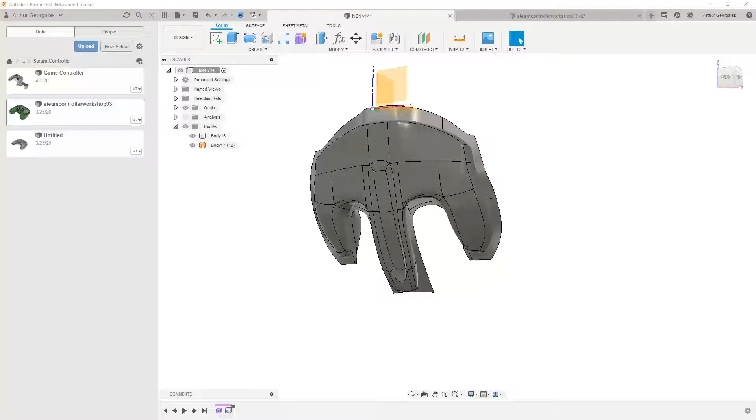Today we're going to look at adding in some details and features to our game controller models. Right now, mine's at the point where I've just got the form, like a solid body, and I've got a non-planar surface to split it up. But we're going to look at a couple little things right now.

We're going to look at adding in some buttons. Yes, this is modeled off kind of like a Nintendo 64 controller where it's wacky with three handles and was amazing. Some other controllers, like the PlayStation controller, have a very strong round profile which is dead flat for a D-pad or directional pad. So what we want to do is look at ways of bringing that in, if we want a flat directional pad or something like an odd shape.

We need a flat surface to bring up buttons onto, which makes it easier to model our buttons for now. So we could do this as a free form, or we could just do something quite simple and sketch it up to control it.

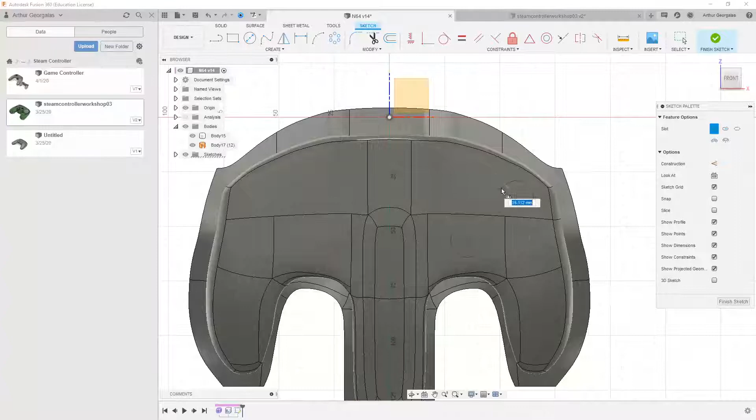Even if I just go to do a slot, something like this, then we want to cut or extrude and position this and join it to the main body. We can make it quite thick because we've got heaps of real estate to work with here. So we can go something like that - doesn't really matter - new body, and then it's just about positioning it in place.

We can just select it, push it to somewhere we like, and play around with these to get the right type of settings you want. It doesn't really have the great control that we see in freeform selections, but you can change the actual pivot points by coming in, and if you select an edge, it will allow you to rotate it across that edge.

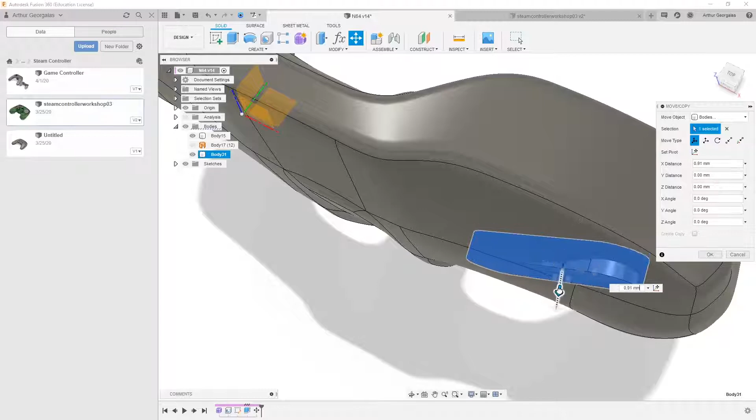Once you tick done, then you can rotate it across that edge. We just want to get it to a point where some of it's sticking out, and we just have a flat surface to work with. So something like that - yeah, that should do quite nicely.

So we hit OK, and we can see that this is our surface. Maybe it would be slightly rounded across the face, but it doesn't really matter for this sort of application right now. So what we have to do is just combine it with our main body - select both of them, operation join. We don't need to keep the tool, and it goes and joins them together.

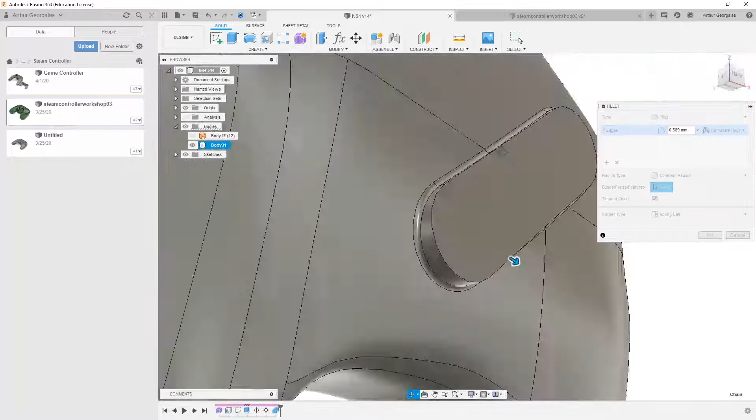Then we just want to probably blend it in with a fillet. With Fusion, fortunately, we can get away with doing a large fillet that goes all the way to the edge. Playing around between tangent and curvature can give you some different results, but curvature generally doesn't like going past the edge. So we can do something like that, and I don't know if it'll let us run one on the top as well. Yeah, see, that's obviously not what you want.

Okay, so something like 0.5 comes up looking quite clean. Ideally this would have some slight curvature to match what the controller's doing there, but again in this case it doesn't really matter, because it looks weird anyway, and I probably wouldn't go with that shape on a final design. So that's what allows us to have a flat base.

We went over this briefly, talking about adding in the same sort of thing for joysticks as well, to just quickly put one of those in. You can do it with freeforms, or you don't even have to sketch something like this - you can literally go create a cylinder or sphere.

So if we create a cylinder, wherever thumbs end up on this thing, however big it is, and then it's the same process of moving it roughly into some sort of position. Maybe we'll tilt it out that way a bit, and have it protrude more, because then you can do something like dome it significantly.

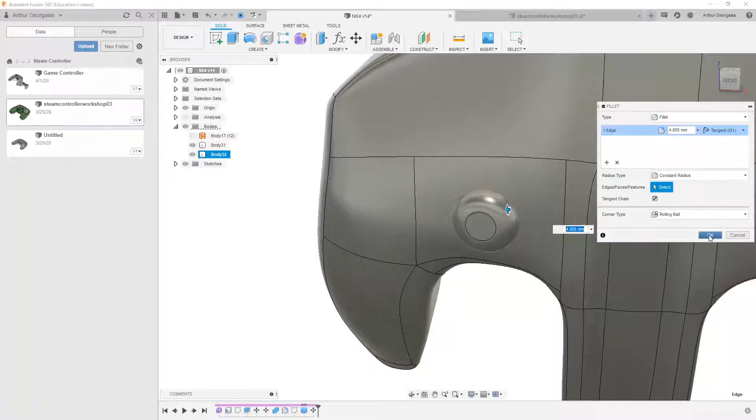It looks a bit small, so we can go back in, edit, change the diameter to like 30, and then it's sticking out the bottom there, so we're just going to adjust that so it's sitting completely within it. Do that - it's nice and domed. The angle's not quite right, but again, that does not matter.

Modify, combine, join the bodies together, and just run a little fillet on there, maybe 4 - that's probably a bit big, maybe 2. So we've got something where it's blended in and it gives us a nice base to work off.

I think the really good thing about something flat is that you can sketch on it, because we've made it using solid modeling and the surfaces are planar, so we get all the control we would want in terms of just sketching. Otherwise you've got to get a plane on there, which might be flat, might be pretty flat - again not really a big problem, but for ease of use I'm pretty happy to go with this way. So yeah, that was just a brief little thing on that.

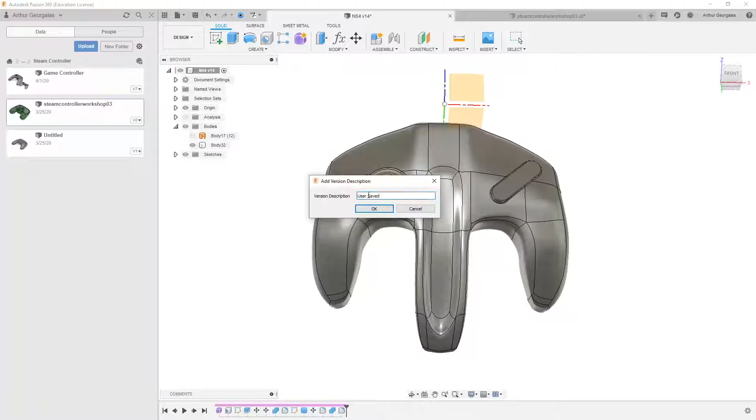What I want to go into is how I go about splitting up a surface. Generally at this point what we want to do is have our material thickness sorted. Right now it's completely solid, which is good, because we want it to be solid when we're adding in these bits, so that when we shell it, it follows along these contours. Otherwise we get weird geometry hanging out in the middle of this thing.

Alright, sorry about that, I just had to pause and start the recording. I was having issues with the fillets I had put in around here and here - they didn't want to shell properly, so I've just disabled them, or deleted them completely for the moment. I'll re-add them in later.

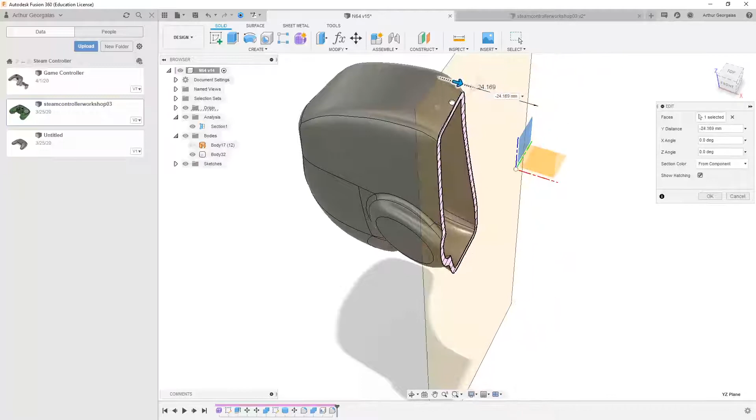It shouldn't matter. So right now, where we've got it shelled already, we can see it follows this inside contour. It's not going to make a big difference if we then fillet something like this after the fact. But sometimes the shell command does not like shelling small fillets, so you might end up with something like this, and you can just round that inside bit later - not really a big deal. Anyway, moving on from that.

Now that's shelled. We always want to do our shell after we've joined our geometry, so we don't get those weird inside shapes. And now we want to find a way to split this surface into two.

And we've got our mad non-planar surface - this is quite a complex form. There are some areas which may not be perfect on it, but if we go to edit our form and hide that main body, we can see it's pretty consistent. You can go through and do things like make uniform, where sometimes it evens it out a bit more when you move it back and forth - I applied it before, so there's not really any change there. You can also use the smooth command, which smooths out some areas just a bit.

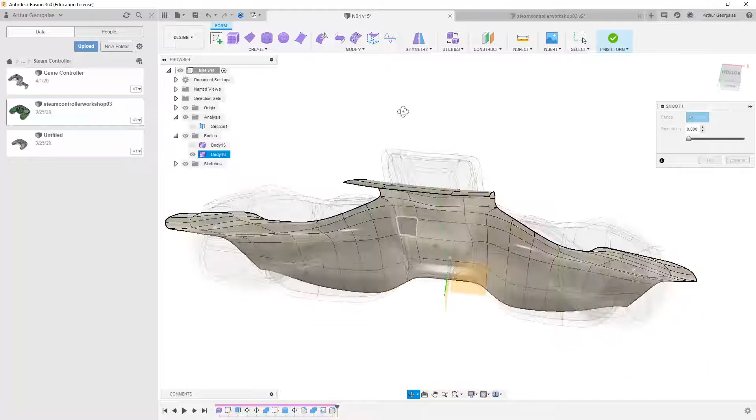So if this area wasn't doing exactly what I wanted, and I was just trying to blend them - see, we can turn that on and it smooths it out quite nicely. Where we have this, it's a little sharper here, and bringing that across blends it up quite neat. You could do that in a lot of areas, like especially down the front, though it can start to be a problem towards the handles, because you generally want a very smooth transition around here on these faces. And if we do that, we can see it's just smoothing them out - that's really up to you if you want to go about it or not.

Sometimes it can do things you don't want it to do, and smooth it badly, so it doesn't have to be smooth in some areas. Sometimes you need a bit of a sharper transition, but that doesn't really matter because we can look at that in a minute as well. But I mean, that seems fine.

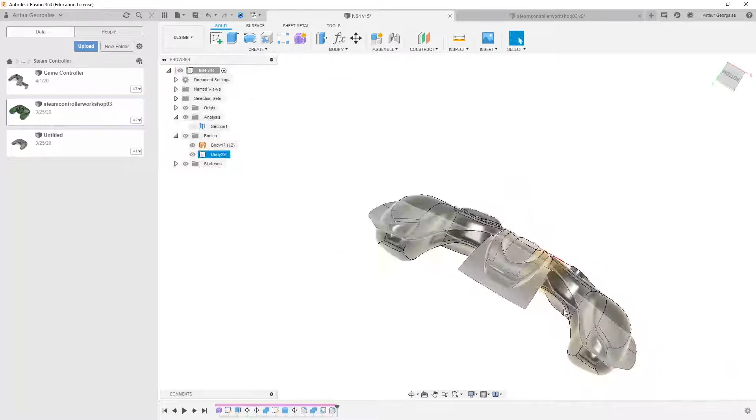So we want to go about splitting this up. The easy and very basic way to do it is to just go split body - select the body to split, so obviously the game controller that is shelled out, and then we select the splitting body. We don't need to extend because we've made sure it goes all the way through. We run through that and we get two halves of this controller.

The problem is there's no real way these are locking together. We want what's called a lip and groove, or in woodworking like a tongue and groove joint - when one area sticks up and the other sits within it a bit. So I want to go through the process of how I do that. Dustin's got a pretty cool way of doing it too, but let's go with my way for now.

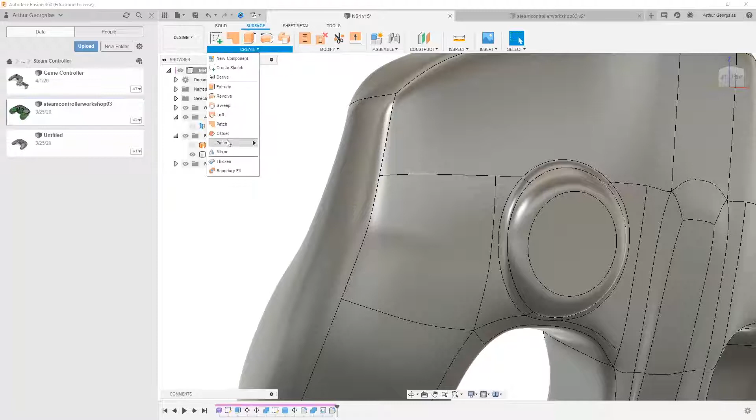What we're going to do is offset our surface inwards till we get a middle plane, and then work around that center section. So what we need to do is, if we know the whole thing here is 1.8 thick, and we're going to split this in the middle, we need to offset the whole thing by -0.9.

That's selected faces. We can't really select the whole body because it's not tangentially smooth. So we can go back, way back, before we actually added any geometry, and throw in our offset here.

So really take advantage of the fact that you can roll your timeline back and forward. I'm just going to put that at 0.9. Because it's such a complex shape, Fusion is going to look like it's crashing every single time I do stuff, which is fine, that's just part of it. And there we go, all right, so that's fixed up.

So now when I roll it forward, we can see that it allows it to calculate the rolling forward, because then it has to redo that split for some reason, that shelling operation.

All right, so if we turn on our analysis, we can see that there is a surface that is exactly halfway between these, which is great, it's what we want.

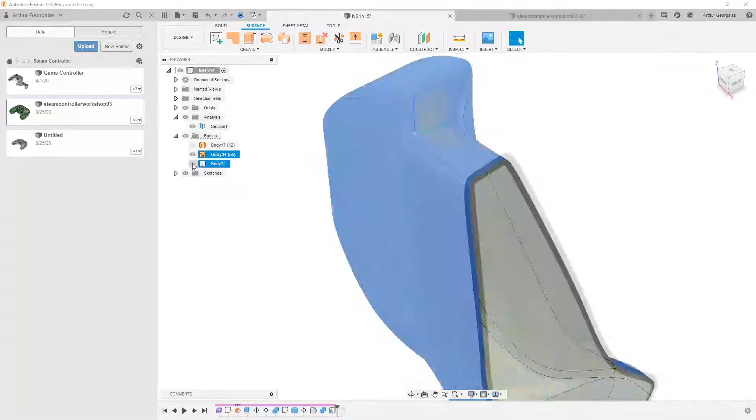And what we need to do now is create a way to make a zigzag pattern or zigzag shape in order to split our surfaces with it. It's going to make a lot more sense when you actually see what starts to happen.

So I had some issues with Fusion crashing again, so we're just going to do it again, offset. What I'll do is offset it 1 mil this way and 1 mil in the opposite direction. It'll let me select it nice and easily. So 1 mil and -1 mil.

This is going to allow us to split up our inside section and create a nice shape that we can then split our body with. I'm just going to remove this one because we won't need it anymore.

Now we want to start splitting these against each other, so you can pretty easily just use surface trim. We want to get rid of the inside of the outside of that one and the inside of the other one. Sometimes it doesn't select through nicely.

Let's just hide that. Yeah, okay, so it didn't really like selecting through it. That's okay, we'll just do it in another feature.

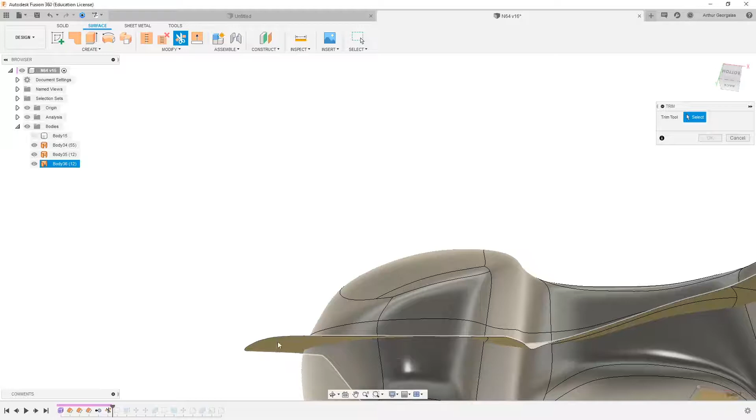So from here, what we can do is trim using this, trim away the bottom. Now we can grab that, trim away the inside of this, and grabbing the inside of our first offset and trimming away the top of the controller.

This freaked out and crashed Fusion just before. I don't know why, sometimes it just likes doing that and not figuring out how the surfaces work. So I'm just going to go ahead and hit save.

Then the thing is, we have 3 bodies here and they're all separate, so what we have to do is stitch them together. In SolidWorks we would call it a knit, but we're in Fusion, so we call it a stitch. As long as our tolerances are high enough and we see green, we're all good. And what that does is brings it all into one body.

So now if we show our shell, let's roll forward a bit to where it's actually shelled out. If we show our shell with our analysis, we'll see that we're cutting a clean path through it. But we also want to work with the idea of tolerance and giving a little bit of gap to the whole body as well.

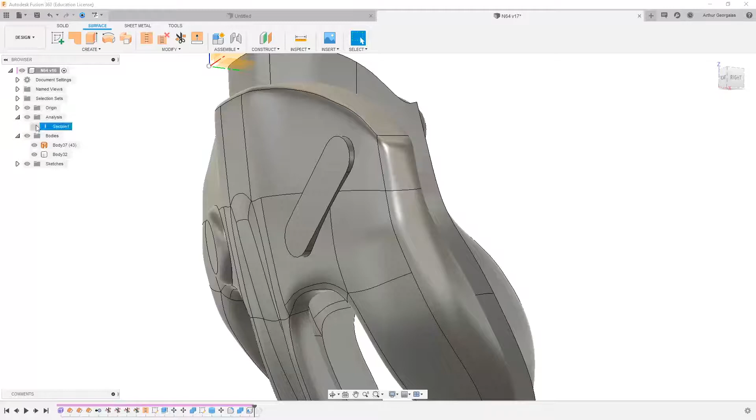So what we can see is, if we can select this body, we can see that it's traveling perfectly through the center, which is exactly what we want. It might be a little close to the top there, but that's okay. We'll just ignore the problem and it'll go away for now.

So then what we want to do is just run a chord length fillet along here, and we can just go like 0.2, see what that looks like. These might take a while as well to calculate because it's quite complicated following around all these shapes. Okay, so that's much too small, so let's go 0.5.

And we want to use a chord length fillet so the distance between the lines stays, well, so the lines stay parallel to each other. That'll make it easier to thicken. So yeah, something like that.

Let that do its thing. Then I'm going to hit save because Fusion's really in a crashing mood today. Sometimes it just likes doing that.

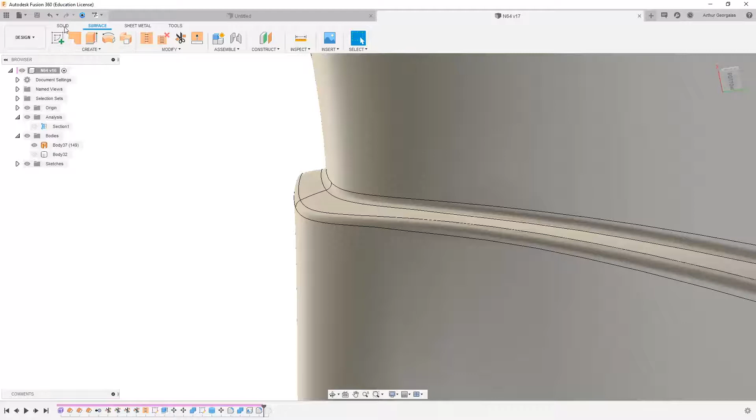What we want to do is thicken this body against our main body. We can thicken it as a new body and then use the combine feature, which should run a bit quicker. So we just go thicken, select this, and I'll hide it and do it as a new body, just so it's actually doing it as two separate operations.

We want to do it symmetrically, so it's pushing away from the fillets and then into them. We can just go like 0.2 and see what comes up. If the other body was showing, it would try and calculate it as a cut at the same time, and it might take a lot longer, or it might just crash. So sometimes it is good to split them up. We can see that 0.2 mil looks like it's going 0.2 in both directions, so it's actually way too large of a tolerance. So let's try 0.05 maybe. It doesn't really matter right now, we just want to get something in there.

Let's let it do that, and we'll use this to split our main body in half. Whenever it gets around to it, there it is. We'll hit OK.

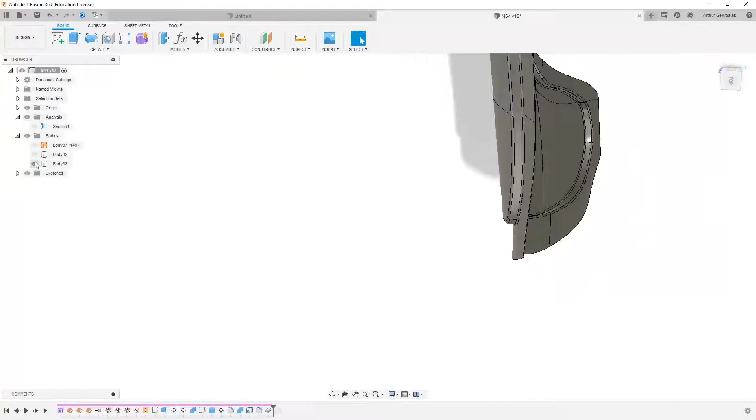We can check this too, again, it's always good to use these analysis tools with the section views, especially when we're talking about keeping a consistent section throughout the whole part. So show that, turn on our section view, have a look, and we can see we've got this nice sort of part here. It would probably be better to have these lips a little bit smaller, a little bit sharper of a radius on that, but that's not really a big deal.

Then it's just a matter of saving, just in case, and going to modify, combine, select the target body, the tool body, we'll turn it to a cut, and when that figures it out, we'll just let it run.

I find I try and use the combine feature a whole bunch in Fusion because it's really quite a powerful feature. It can get a lot done that you don't often see working well in other programs.

So here now we've got this really nice uniform cut, and we can come back in and change some of these dimensions if we want to make the tolerances tighter or looser. And we've got it coming all the way around, and it looks quite good, quite neat.

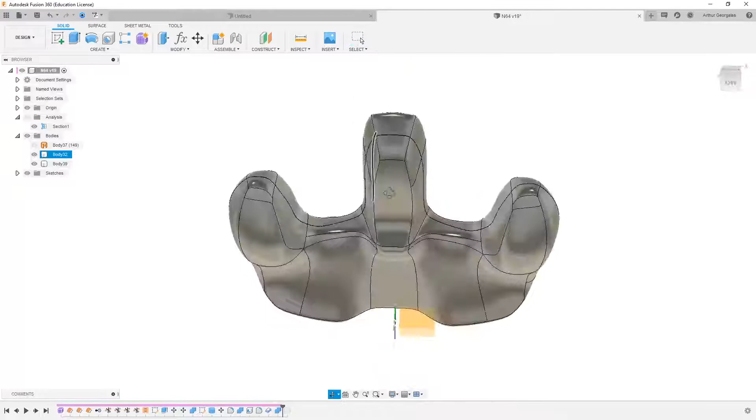One thing we want to check for is that these faces are a regular sort of width. So if we were to mix up our cutting plane and it was at a large angle, cutting across this at a weird angle, we would see that the distance from here to here would be a lot different from the distance from here to here. We just want to make sure it's relatively consistent throughout the cut. Otherwise you're not cutting perpendicular to the body. So yeah, something like that works really well for cutting it up.

Then you might want to run a really small fillet on this edge. In terms of rendering, we're going to be looking at getting our part line showing, since rendering up our part lines makes it look much more like a product and much more professional. So when we come into here, we turn on In-Canvas Render.

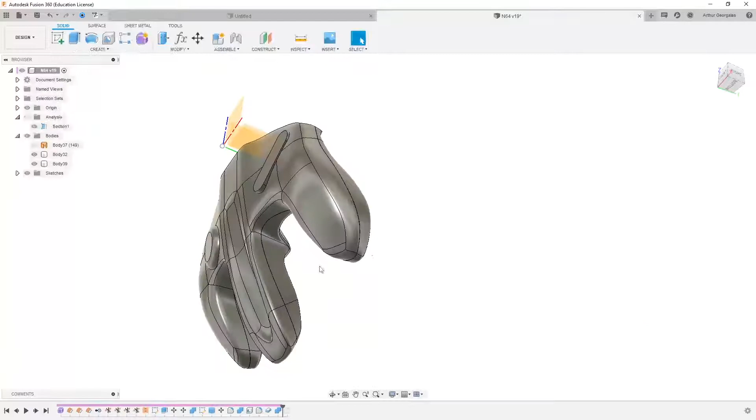We can see there's a very slight lip in there. We actually want to come back and maybe make it a bit more noticeable. Sometimes you might find on the real products that the lips are really small, but this is one of those things where for the design purpose, we want to show off our skills. We want to show off we know how to model in a lip and a groove and all that. So the more noticeable you make some of these things, it can actually be beneficial instead of trying to make the cleanest, smoothest surface ever. You want to show that you've considered those elements in the design.

That doesn't look like it's working, so let's just go 0.2. It's probably too large and was running into the other elements. So something small. Chord length, again, you want that really consistent. Even that does look a bit large, but I'm going to live with that right now. Once that finishes calculating it and applying it, we can go and have a look at how it looks in the renderer.

And we can already see it's a bit more noticeable. We turn on the renderer, or in Canvas Render.

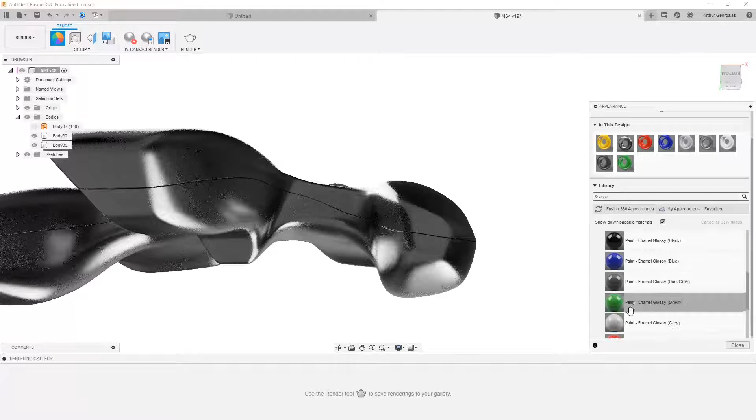I might just throw a gloss color onto that. Down to paint, gloss. Yeah, gloss red. Gloss yellow, why not? So we can see that it gets this really cool part line between them, and that type of shading, the ambient occlusion, is really good to see.

Because it looks like it's designed to actually snap together, which it is at this point. So I'm just going to show that and go ahead and make these a little less gross. So we've got that. Our product is now, our controller is now split nicely in half. We want to look at implementing other parts of the design.

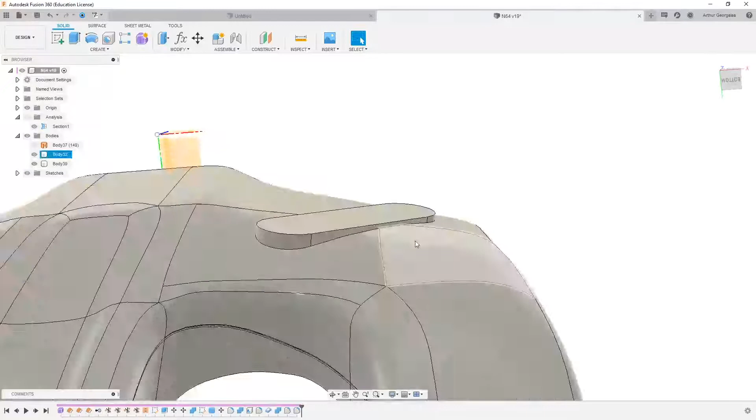So I'm just going to roll this fillet forward, which should round that out. And we'll just blend this back in again nicely, seeing as it doesn't want to crash anymore. Hopefully. Nice chordal fillet there.

And I'll see if it can do one on top without killing it. It cannot. Okay, so a constant radius works because it can blend that together a bit better. Let's just go, can we get away with 0.5 on that? Nope, 0.25.

Okay, so it's going to be a very sharp edge on that. Well, somewhat sharp, but we'll live with that. So what we want to look at is how do we put a button on this type of surface?

Our best reference at this point is to go to our Steam controller and open it up and have a look. We want to look at how we make buttons, how they make buttons. Let's just ignore that. And what we have to do to actually bring one into our thing, model it up right, and make it look real and, to some point, manufacturable.

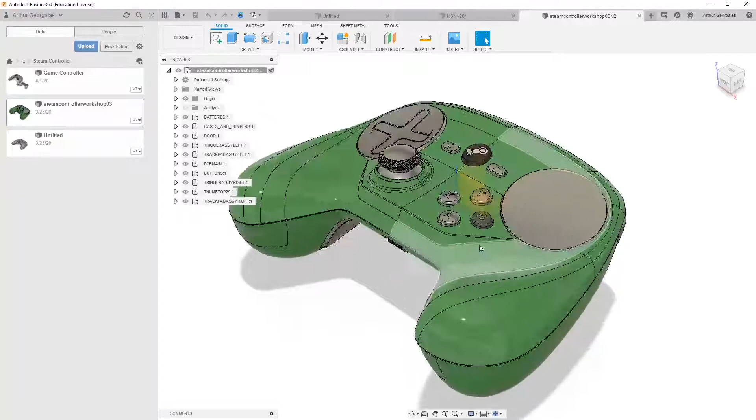So we've got the buttons here. First thing we want to do is just hide that main body. And we can also get a good idea of the PCB at this point. So these aren't super long. The PCB should roughly be in the middle of the controller as well. And that's important to note.

So right now we're going to be looking at the buttons and the thumbstick. So let's have a look at one of these buttons at the moment. Let's go with the X button, because why not? So we can just open up buttons, come down to button X, right click it and go isolate. That's going to allow us to see just the X button.

And if we open this up, we can see it's made up of a couple little bodies. It's got this inner section, and it's got some markings on the inside, which are neat. And it's got an outer section which sits over it.

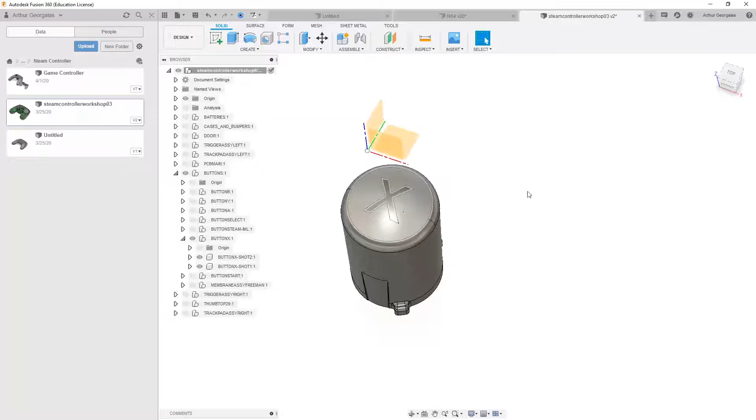I mentioned this briefly, I can't remember if it was in the introduction video or one of the other ones. Generally, the way it works is the inner body is colored. So this will be a solid color, this whole section. It'll be injection molded in a color, and that snap fits into this, which will generally be like a gloss black or gray. And so no matter how much your finger or thumb wears down this, you're not going to lose the color.

The plastics on both of these are going to wear down at an equal rate. And we are talking minuscule amounts, but over the years of using a controller, you still want those buttons to be nice and crisp. So pretty much looking at this, what we have to do is create some sort of cylinder within it that has an X extruded out, and this one has to match the bottom one. So we can do something like export this out into its own thing and have a look at it there.

So let's go ahead and do that. What we can do is select our button, right click, and export it. That's going to allow us to save it. It does want to go in Advanced CAD, Steam controller, game controller.

Another part that's really important to look at here will be the thumb pad, or the thumbstick, sorry. It's got this weird knurling on the top. I would probably avoid using that.

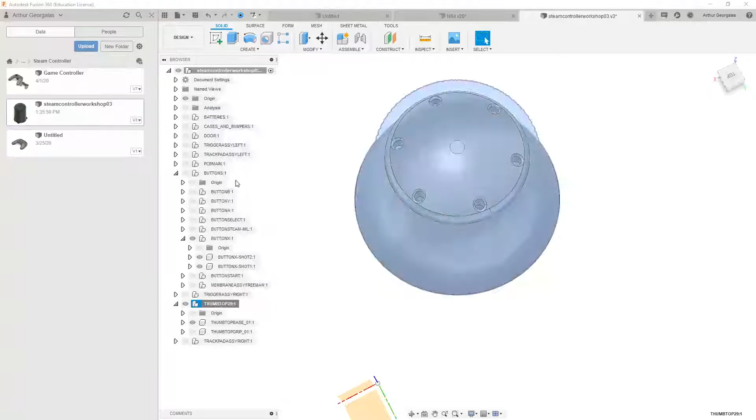We can grab this as well, so we take the base. That's just a body, so we do actually have to export the actual part. So we select it, export, Steam controller, thumb top, sure, just go OK. That's going to take a second again.

Okay, so having a look at our buttons, we can see that it's got the inner and outer part. This one's gone quite transparent, I'm not sure why, but that doesn't really matter. We just got to remember that it travels down into the body of the controller. It only protrudes out from the top a little bit. Hopefully turning on cases will show us exactly what that's like. Okay, doesn't matter.

So we've had a look at our button. We know that it's got this sort of cross section going on where there's an inner and an outer component. So we can go ahead and model that up on our pad.

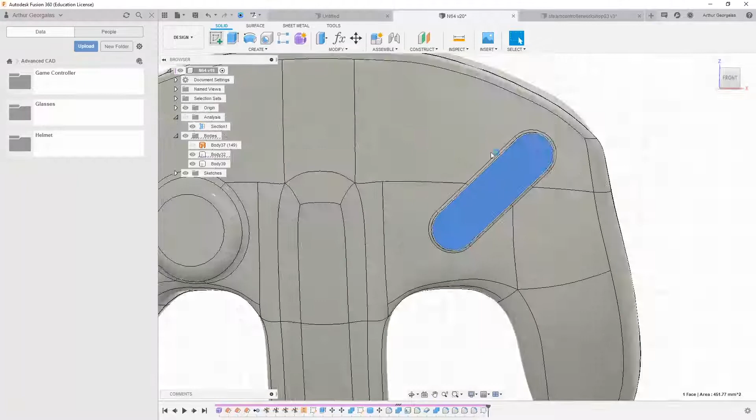Because we used a flat surface here, what we can do is just start off with a sketch right on this face, and maybe we want to fit nicely here. We'll have like 5 buttons down here or something ridiculous, it doesn't really matter. So we can go and create a line across here, and use that as our reference for finding the midpoint or the center point. Sometimes arcs like to pick up easy, sometimes they're a bit complicated.

From here we set a dimension of 10 mil, seems good, maybe a bit too big, but whatever. This is going to be the maximum size of our button. We want to extrude it, and we want to make sure we're extruding it directly up and down. So what we want to do is extrude this directly upwards.

Unfortunately, Fusion is a little wonky in that regard. It doesn't allow us to select a direction to extrude along like something like SolidWorks might. So either we could have our buttons at an angle, or we could figure out how to extrude it directly downwards. So we're just going to have a look.

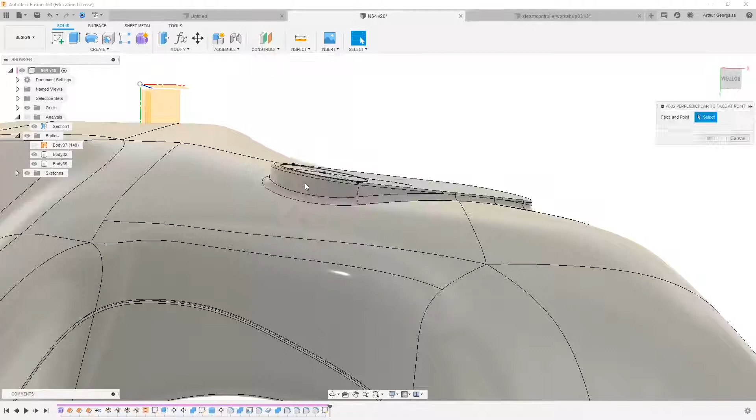Maybe we can use an axis to help us. So what have we got? Axis perpendicular to face at a point, no, that's going to be the exact same thing. We can go construct axis perpendicular at a point, through a cone, axis through 2 points, axis through an edge. So there's not a lot of options here. Like you would like one that was through from a point and directly up.

Maybe we can just create one by creating a sketch, doesn't matter where we select it. If we turn on 3D sketch, and select line, we can go from here. And from here, if we go on, say, like the right plane, it allows us to do that. We hit OK, and it actually comes up with that sort of green line, which shows us it's on that axis. So we can just hit finish there, and that's going to allow us to extrude this straight up.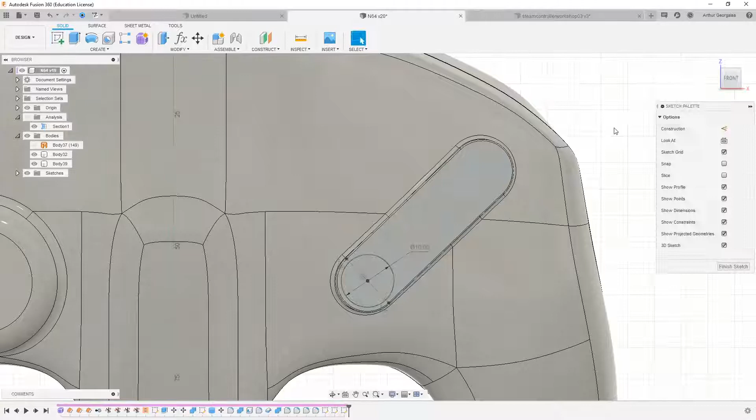We could do other things, we could just go straight from a sketch on the original front plane. So we could sketch down here and then position our cylinder, circle thing, and extrude downwards like that. So there's different ways of doing stuff. If we wanted it to start there exactly, we could do it with that line. So what I'm trying to get across here is there's a bunch of different ways to do these things. Some make more sense than others.

Fusion wasn't designed with coming from SolidWorks in mind. It was designed from the ground up differently, so you kind of got to assume that not everything's going to be the same. So what we might do is just recreate that sketch, so we will project, unless we can just project that point.

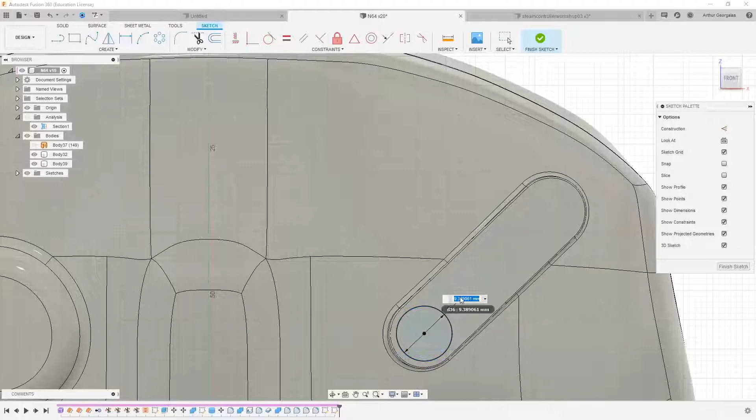And just go OK, which we can, which is great. And we can create a circle. I think I just removed it from my toolbar. Go across here, dimension that to about 10. And what we're going to do is just go straight down. And we want to make sure we're making a new body.

Select it. Okay, it's still going to change when it hits the next body. We just want to ensure that we're working with a new body here, and we can go ahead and turn on a section analysis.

That's not really going to help us because it's not in the right spot. So what we might do here is change our visual style to wireframe, and we just want to make sure that it goes down somewhere where we might actually have our PCB. So we can go down further and trim it up later, that's fine. And we'll go back to our normal visual style. We just didn't want it poking out the bottom, which I have managed to avoid.

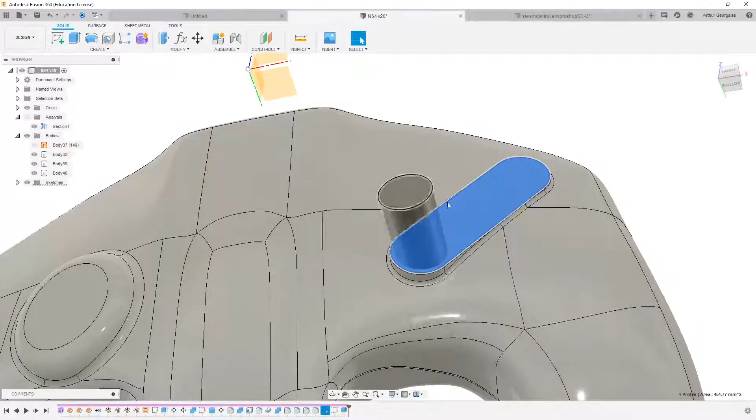Then if we want to actually trim this up to match the surface, we can come in and offset this and trim it with that plane. Right now I'm actually, I guess I'll do that.

Surface offset. It's not going to let us select just that, is it? Let's just turn off chain selection. We'll pull it up to somewhere where we want it.

So we only want our button to come out a couple of millimeters from the surface. So something like 3 mil is probably fine, maybe a bit too much still. It looks quite bulky. So let's just go maybe just 2.5. Not a big difference, but whatever.

So we do that, we can then split our body. Split our body with the splitting tool. Get rid of this top section. You could probably just use trim or something like that as well.

So now our button kind of matches up the direction of our surface with the top, but it's still extruding straight up, which is fine.

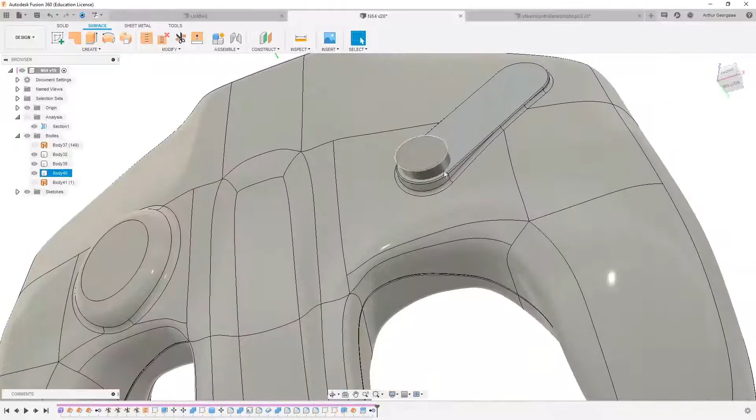We can put a fillet on here to actually round it down. Maybe we want it straight once it gets to the top. If we go to chord length, it actually evens it out a bit again. I find that chord length's pretty useful. And we can actually go under the surface here a bit to make sure it's rounded all the way. So 4.15 should do it, like that.

And then what we want to look at doing is starting to split this up. So we know that we're going to have a second body in here, and that's going to have a button extruded through it. So what we have to do then is create an offset of our main body.

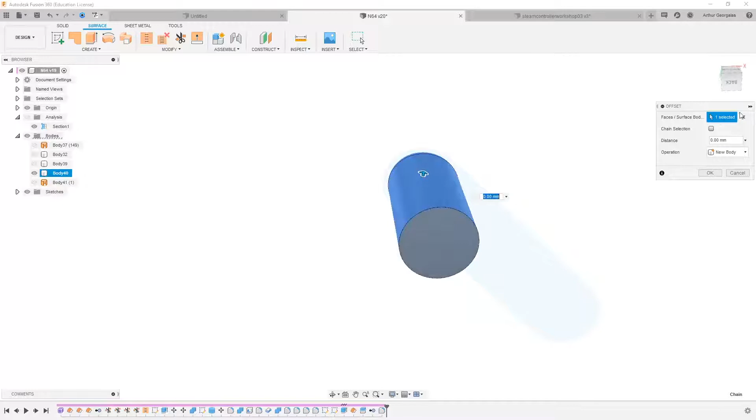Now this stuff doesn't have to be perfect at all. It can be quite close, or you can offset this on its own and split it up later. So we can just go offset, and for some reason it really wants to bring that top in, even though I've got chain selection off. So let's just go where the outer one is still relatively thick. So -1.5. We can have a look.

Yeah, that's fine. What we probably want is to make sure the bottom here is flat. Like across here, we probably want it to be flat.

So what we can do is show our main body, and we'll create an offset of this face at 0. Again, chain selection. Just the face, please. No.

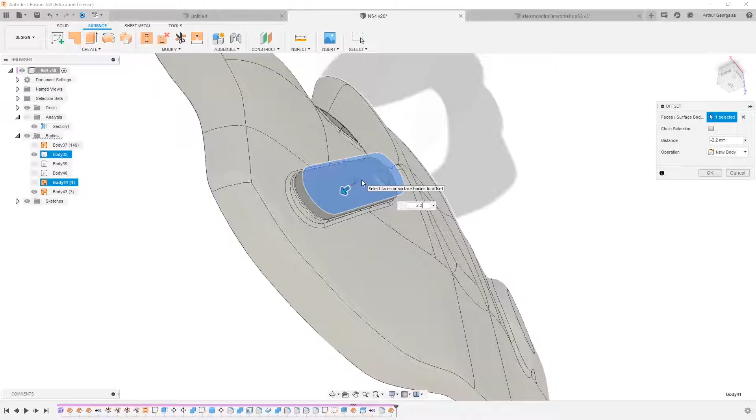It's enjoying being frustrating, unfortunately. I can select this one and bring it back down, but I'm not quite sure why it just didn't let me pick that, so that doesn't matter. We can go -2.2, something like that. That's just going to flatten out this one a bit more.

And using the trim tool, we can delete it without having to remove it later. Oh sorry, we can just trim it away because it's a surface. And then what we can do is, if we patch that, that's going to give us a flat surface we can actually sketch on, which will be super useful for pushing up our letters through.

So what we want to do then is stitch these two components together, or these two surfaces together. So we've got this little shape here. Then what we can actually do now is split this solid cylinder, and we can just go split body, splitting tools, and that's going to allow us to separate them. So we might want to turn on extend so it just shows up through the bottom, make sure we get a proper split.

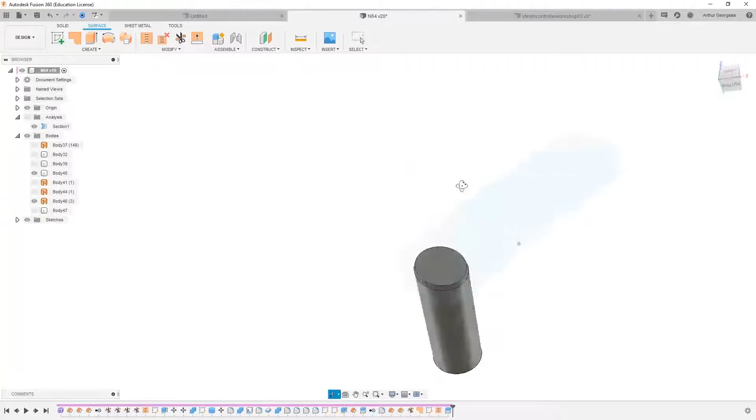Now that we've got this top surface we can sketch on, we're going to get the same sort of problem in terms of the direction. What we can actually do is sketch on the bottom of this and go all the way through it, so it's a bit annoying. Let's go from the front, I think we're upside down. But essentially what we want to do now is pick a letter that we can place on here and extrude up. So we want to create text. What is a number or letter thing we can put?

Our text will be, where is it? Unless it was putting it below it, so let's just try that again. Text. Yes, 10 millimeters, okay, there we go.

So now that's working. What's a weird letter that isn't on a thing? We can use the U, which is not used in any controller that I'm aware of, and we can just change the number down, make it like 6 mil, position it. I'm sure you'll be a bit more careful in the way you position it and make it look awesome. You can obviously change the font to whatever you'd want at this point.

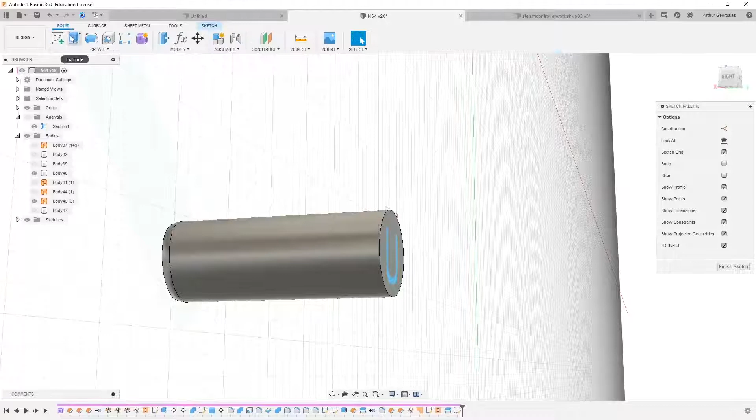And then it's just a matter of solid extrude. Profile we want is that text. What it's going to do is cut through it. We want to change that to join, so it joins our body, or we can change it to split, new body, because we're going to merge it to the other one in a minute anyway. And we want to show this. So what we can do is our extent can be to object, and if we select this object, okay, we can see it goes up to the face.

Ideally what it should have done, if we turn on that, has that worked? I can't really tell. Yeah, so it looks like it's gone just up to the face, which is what we want. We can offset it a tiny bit, not by 1, but 0.1. No, okay, so it still doesn't like it. It's been very painful and frustrating, unfortunately.

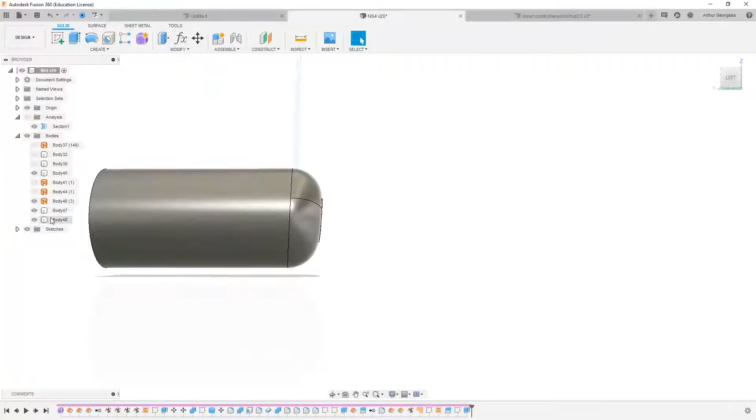Okay, that might work by going there, even if it's slightly less than that, like 0.02 of a mil. Something really thin and slim, it's going to show up a little bit more in our renders, which will be pretty cool. So we hit OK. It's given us a new body, because right now everything seems to be a little bit more painful than it should be. So what we can do is just show that, hide that inner body, and use this body to split this one. So body to split here, splitting tool there. We don't need to extend it.

And we just want to get rid of this little section here. So right now we've got this big body here, it's hollow. Let me turn off this little surface. So we can see we've got the part that has the cutout, and we've got the body that sits inside it. And now finally, we can add some color to it to make it show properly as it should, as a button on the surface, right? So that's how we get our U button.

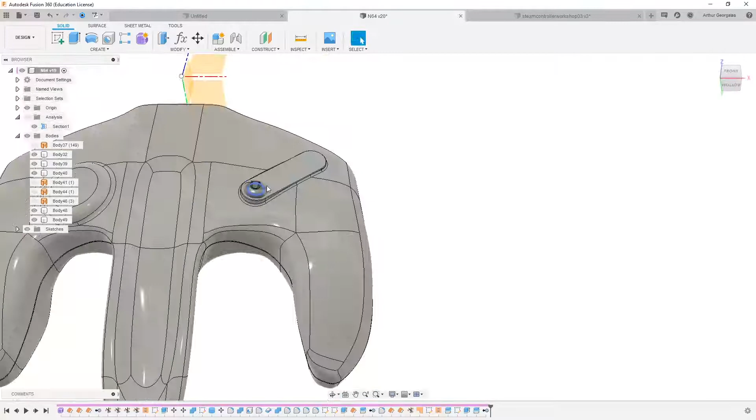Now that obviously looks a little too big, now that I think about it. So I can just go into wherever we originally sketched and extruded this thing up. Oops, I think that was just our font. We can go back to here. Is that not it? All right.

Okay, it's all the way back here now. So that uses that. Right click, edit, let's just change that to like 8. All right, so that's looking much better. We've finally got our U key.

The fillet on the top is a little large, it shouldn't be that round or probably sticking out, but it doesn't really matter. Again, this is just a really rough demonstration. As I'm sure you can tell, it's definitely a little rough in some areas.

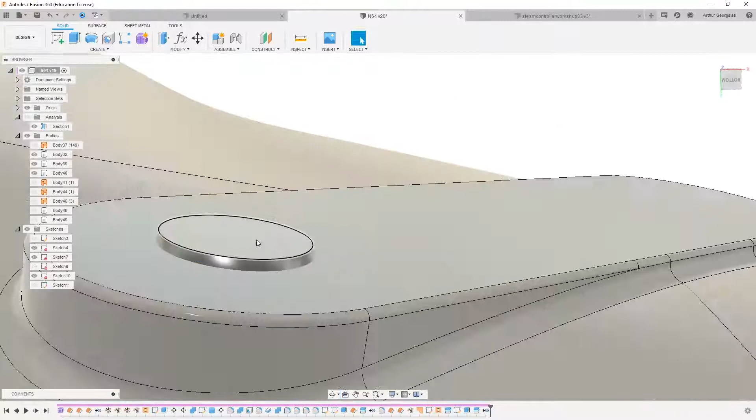And we can hide that, we don't really need that anymore. And then when we hide our body, we can see that... oh sorry, I didn't join these two together yet. So what we want to do is combine this to this, we want to join them. We don't want to keep the tools.

Okay, so now we've got this, which sits inside it. This should probably be a little bit larger, just get rid of these areas, but that's fine. As long as that all looks mostly right, we're good.

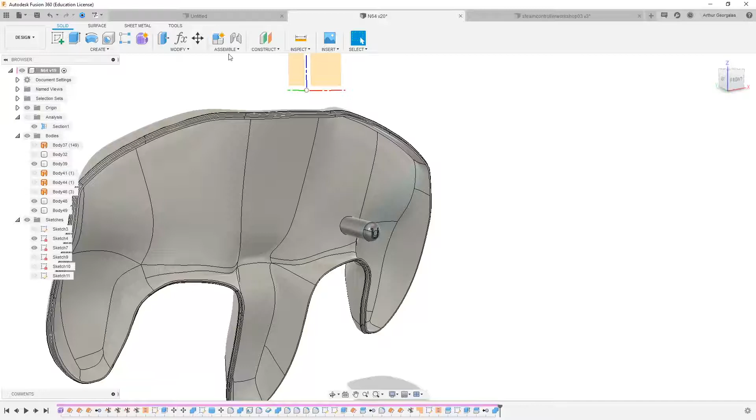If we want now, we can look at just mocking up a PCB or something that would control everything. On this controller where it's all bent up and wonky, we might find that's going to be a bit tough. So what we'll have to do is find a nice actual section where we can get a big enough PCB that actually makes sense. So what we can do is go section analysis from the front.

And what we can do is just bring it down. At this point, we can have something that fills in this sort of area, and we might just do that. We know that's about 30 mil from this top plane, so I'll construct an offset plane, 30 mil down here.

And I will create a sketch on this plane. Even turning on the section view will kind of help here. And we can make it quite rough. Obviously, you probably want it symmetrical.

And we can just go. If you click and drag, it brings out a straight curve section. Maybe it'll even come down here for when we put a rumble section in. It doesn't like doing that in that direction, so what we'll do is press escape, delete that off, and come out straight here. Still doesn't like doing that.

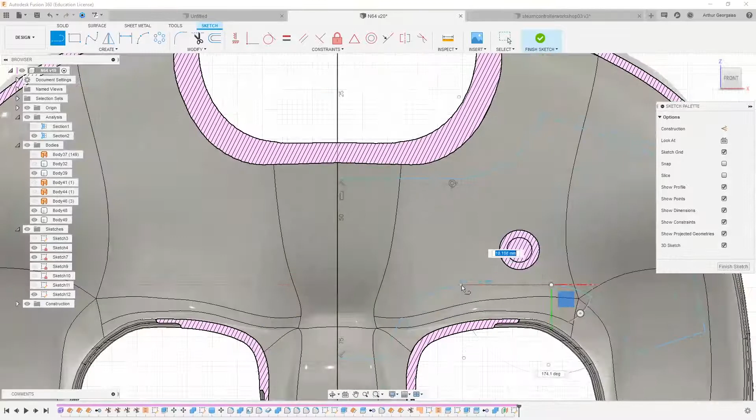So then we'll just create our own arc because we don't need to use their arc, we can use our own. Something like that. Join these up. We just want to be sure that we're getting some good relations here as well. So we turn on tangent, make sure that's tangent. Make sure that's tangent, and then we can say that's a good base for our PCB.

We'll make this a construction line. We will mirror it. You can double click to select a group. Do that. That should then go solid again. And now we know where our PCB is going to be.

We can extrude it up by about 1 or 2 mil. Let's say we go 2 mil. Just go new body. It does look quite thick, but that's okay. Generally, you want to make sure these are thicker rather than thinner, just for realism's sake.

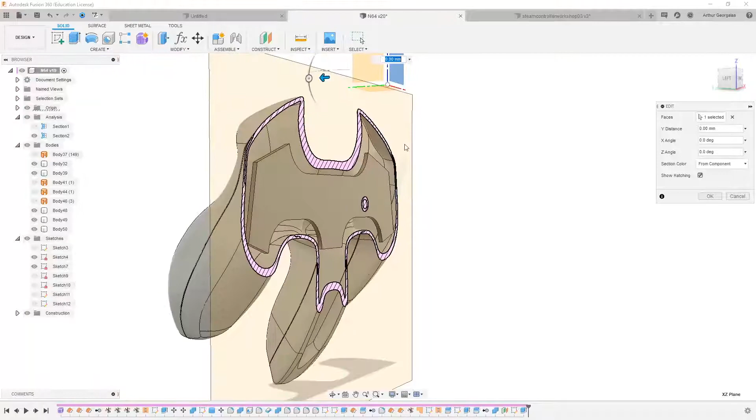And we might find that we get an issue up here where this might collide, so we can always go back and adjust that and have a look from the other view. It looks like it's going to clear it quite fine actually.

Maybe we'll just put a fillet on that outside edge. So yeah, we can say this is where our PCB is going to sit, which is good. Hide our section view, and just to double check again, we'll have a look on the bottom.

Yeah, that looks fine, and we can just actually go around and round these edges. They would probably not have sharp edges like this on an actual PCB. Generally everything is rounded out a little bit. Just go through and quickly select all those. 2 mil. Yeah, that's fine.

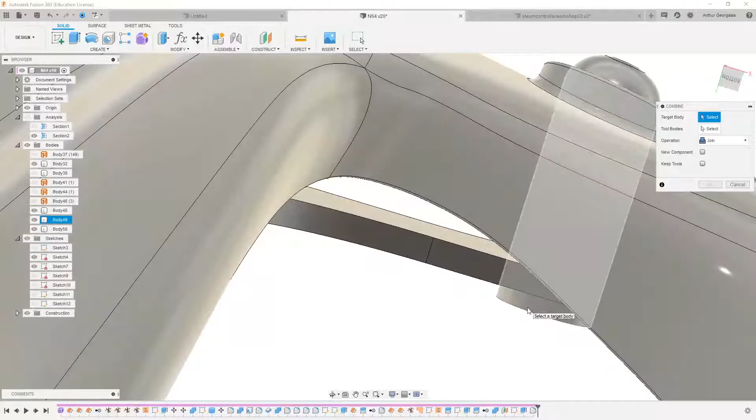Okay, so let's say that's where our PCB is. One of the problems is our button's currently touching there, so we can even just go really quickly, combine, target body, that, and then we want to cut. The tool body is going to be this.

Then we can just run the same command again. Target body. I didn't keep the tool body because I pressed the wrong button, so we just want to make sure we keep it. So we can do this later on to just clear out everything below this line, if we don't like it, because that's just right now how we can check it.

But otherwise, what we can just do really simply is show this, hide our top body here. Pardon me, and there's a couple dodgy ways you can do it, which are always kind of fun, of just creating a plane on this surface. You could even dimension it for bonus points.

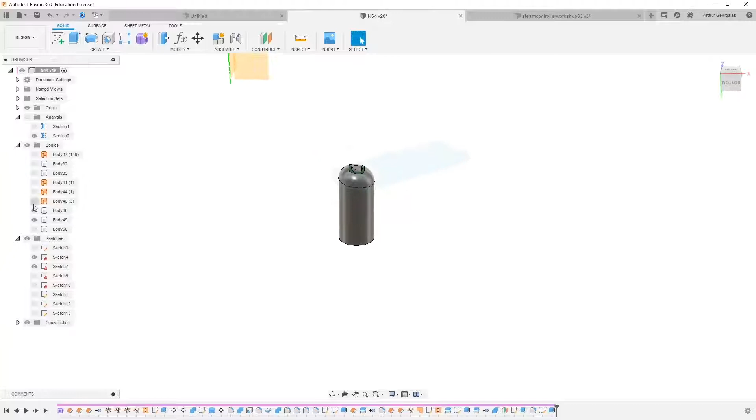Then it's just a matter of extruding it down, and it'll cut anything that is below that. So then when you turn your PCB on, it matches. That's fine for now, right? In terms of PCB and functionality and visualizing it, I'm not too fussed.

If we want to get a joystick in, it's a similar sort of idea. We have our Steam controller in the workshop. Let's have a look. What we want to do is turn off that isolation, find our thumbstick. Let's isolate that.

And we want to export. Save to Project Cloud. I think this is what I was having issues with earlier. It's been saving it to my desktop. We can save it to the cloud in Fusion Files, Game, Steam Controller, or just go Game Controller. Hit OK. Yeah, and here we can see it's trying to save it out or save something out. That might take a second.

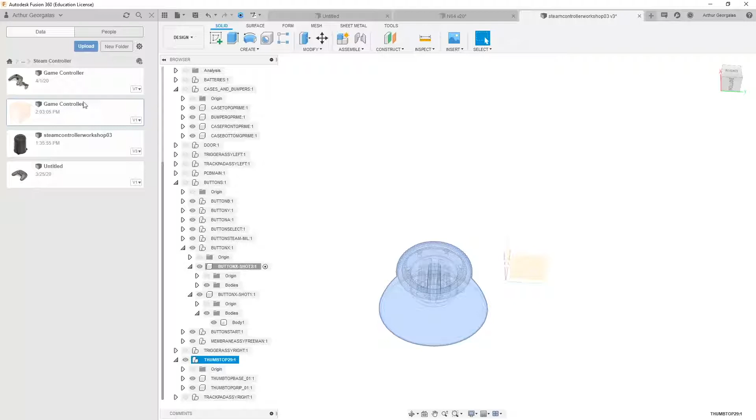Alright, so now we're back here. We can open this up - for some reason it called it Game Controller, but it's a thumbstick. We probably don't want that top grip, we want to make our own. It's got these little bits for overmolding and stuff, and we can also play around with it. I don't like how thick that looks, so I can just press pull it in a little. It's always fun to play around with it like that.

Sure, I'll say I'm happy there. And what we want to do is bring this into our actual thing we're working on. So I'll get the Steam controller out of the way. Over here, what we want to do is drag that in, or we could right click and insert it. It's just saving, and then it's going to load it up. So now we've got it loaded in.

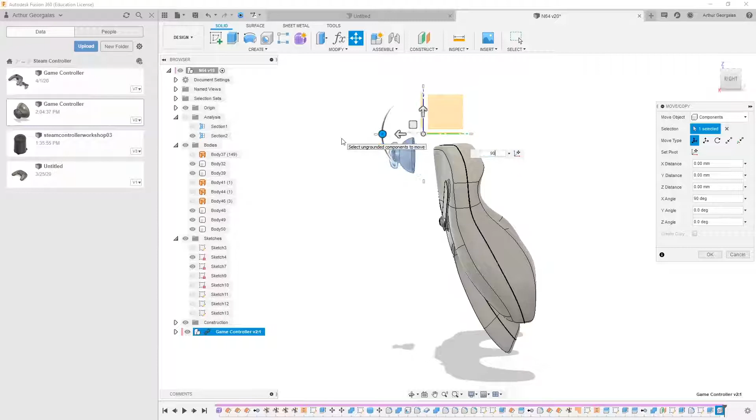We can do a few things to play around and actually position it properly. First, we want to allow us to rotate it. For some reason, it's not giving us the proper rotate command. There we go - we can punch in 90 if we want to make sure it's 90 degrees, or when we want, we can angle it down slightly like that. We can roughly position it too.

There are ways of actually getting it really neatly in position using move commands and the point to point tool. Sometimes you can select one point and the other like that, and it joins them up. We still have to play around with rotating, so we can set the pivot point of the object around there - that'll allow us to rotate it around that actual spot. We can push it in somewhere, wherever makes sense based on your design and thoughts. It doesn't really matter.

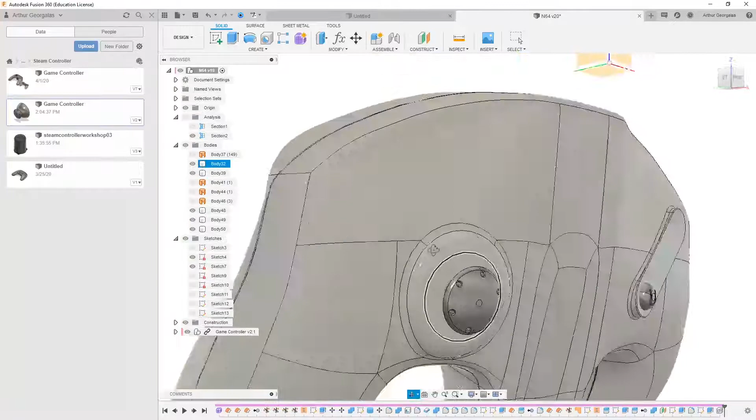With that located in position, what we can do is start to actually punch out our cutouts for this. Sometimes it's easier to work with a section view turned on. So I can bring it across here, and we can see that we want it to cut out around somewhere here. What we might be able to do is use this face.

So, select the face. Okay, turning chain selection off and on managed to fix that issue I was having - that doesn't make sense, but whatever. What we can do is go 1 mil off here. I'll turn off section view and hide that body.

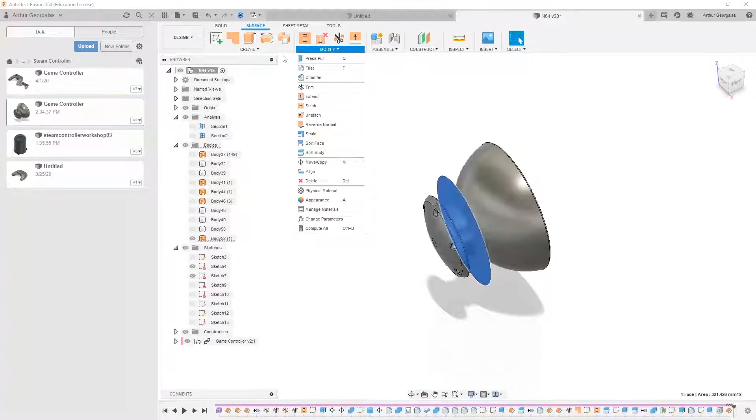What we can actually do is thicken this - create thicken, because we want to make sure that it's going all the way through where we want it to. Make it quite large, it doesn't matter. We can press pull it to make it bigger, then do something like add a chamfer to make it a bit tidier. Looking at the actual body we're modifying, where it's gone - we want it to come out far, but we also want it to be at a slight angle, possibly inwards actually. So we can do something like that.

If we isolate, we can look at putting a chamfer across it - something like that, maybe not equidistant. Maybe we'll go 2 distances and change how far that comes out. Chamfers can be really good to play with.

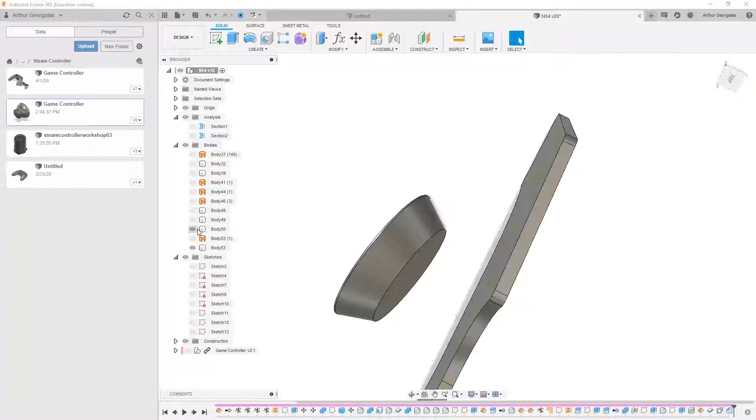And we just want to find our body again. We can then go modify, combine, target body. I think we're getting used to the fact that we're going to be cutting out a lot, so this gives us that nice shape here.

When we see our joystick down here, we can see that it's probably way too big. But that's because our whole surface here is too large. So what I would probably do is bring all of this in tighter - maybe I'd even bring this in first and model around it.

We can go back to that offset and edit that to like 0.5. It might make it look a bit better, but the idea of this being like a super large area is a bit wasteful, so you probably want it nice and tight around there. Maybe you want to move this.

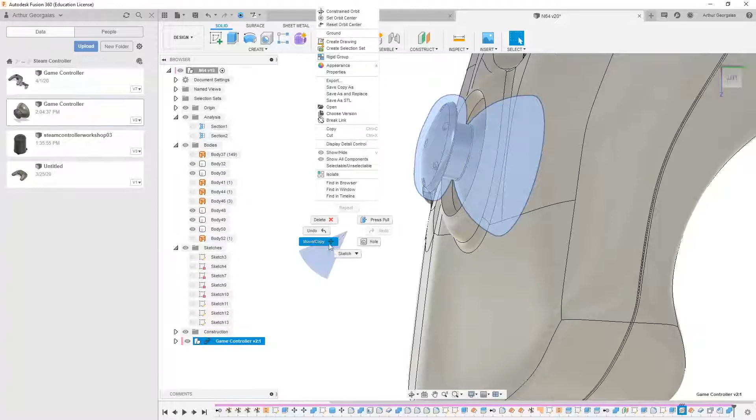Fill it out however you want it to look. You should actually go in and model a softer looking thumb pad than the one it came with, but that's one way of getting that in there.

One other thing to look at is how to put in a trigger or shoulder button. I've modeled one up since they're a bit finicky to get the shape right, but this is a nice wide one. The idea behind a trigger is that it's actually able to rock in place a bit.

If I do that, they're meant to tilt down. So we want to make sure there's a little bit of clearance around them when we cut them out. But to try and simulate that joining and all that is actually quite complex, so we can avoid that for now.

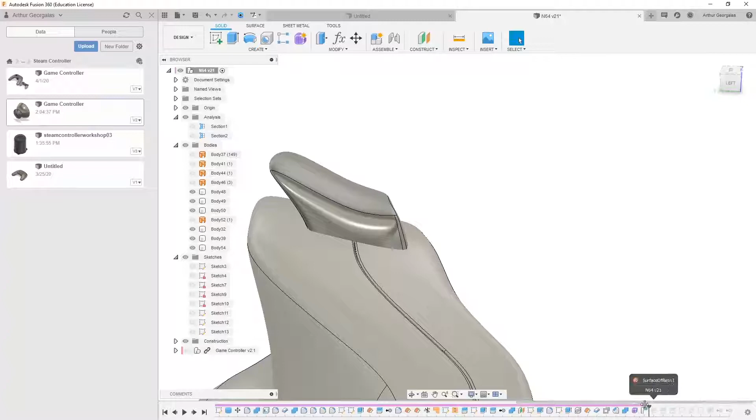To cut something like this out, you'd just model it up in place, or you could split a face and sketch and do something similar. For this case I've just made it a complex 3D form, then simply offset it outwards. Here I've offset it by 0.2 mil, but maybe you'll do it a little tighter, it doesn't really matter.

From there it's a matter of splitting the actual controller underneath it with that newly offset surface. So we've got this body here, we can now hide that or remove it, and the same for the bottom section, which is split as well, so we just need to hide or remove whatever that is.

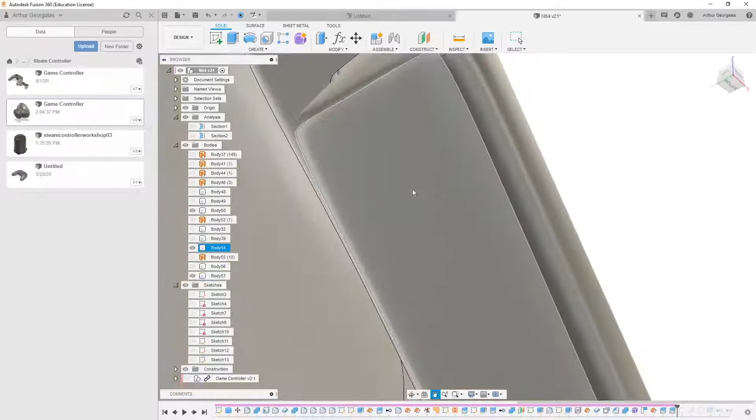Now we've got a thumbstick that fits in quite nicely. If we hide the top, we can see how it has that little bit of tolerance around it, so that's all good. The other thing to do with something like this, it might have an indented button.

One way we can add that in, since we want an indented button with a bit of text on it, is to project it onto the face. The problem is our face is quite complex, so in order to do that we need to create a plane in the right position.

Now I've got this modeled up here, but I'll just go and do another one. From the top view or any other view, you want to get it right in the middle, following in between, like that. From there we can actually move this in 3 dimensions, so we close that and go to move.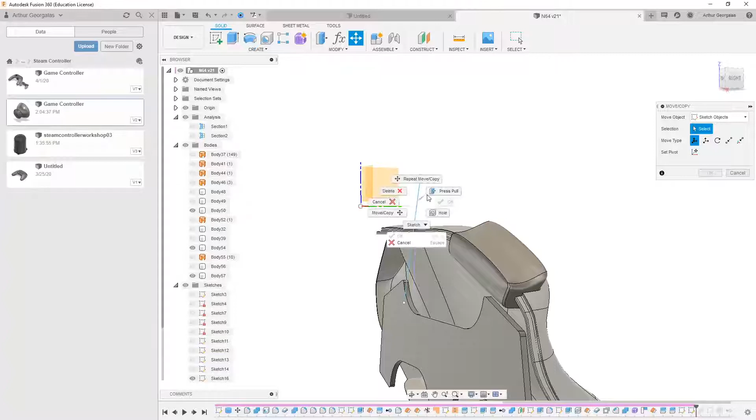Sketch objects, and pull that down into place. We can do this by checking that the plane is in the correct location, or something like that. Maybe we want it tilted up from the front and pushed down from in there, so it's following almost directly into it. So we can actually modify our sketches in 3D space.

This allows us to create a plane along a path. So we select our path, and we can see now that plane is colliding pretty well. It's a little off, so we can go in and move that some more. It updates as well, which is good, so we just move it some more, and then it's a matter of creating a sketch on that face.

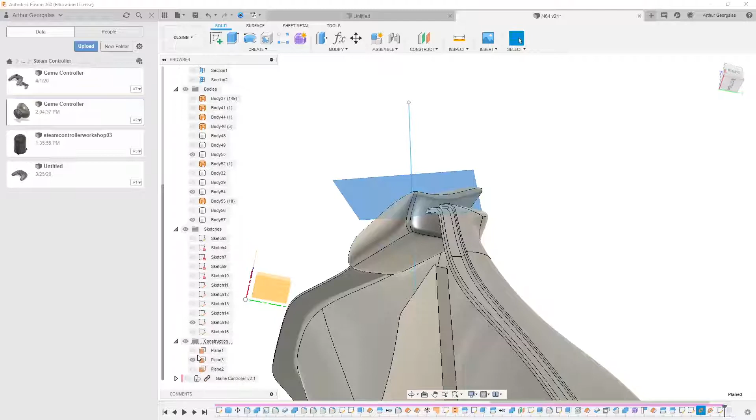If I just roll forward a little bit on that plane, sorry, let me just hide this new one. Then we're able to create a sketch. Mine was a little bit further back, it doesn't really matter, where I've just hit R2 and was able to project that to that face using an extrude.

Opening up the extrude, the way I had it set up is to go extent to object. We could go distance, and that just starts pulling it along in a direction, but if we go to object and select the object, we then get the option of setting an offset. So wherever it hits here, it's going to go 0.2 mil further in, so negative, hit OK. And there we have a pretty decently etched in button identifying label or whatever you want to call it.

The only other thing we really need to think about at the moment is how do we connect the top and the bottom of these two halves, right?

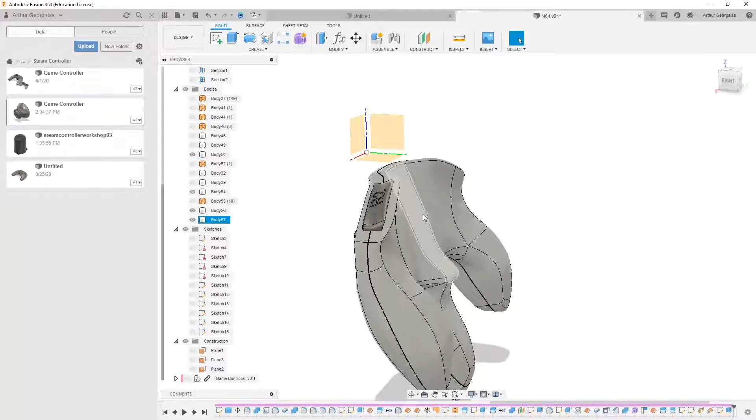So there's the groove, but generally there would be a screw, or multiple screws, holding them all together. So we want to find these big areas and add in what you might call standoffs or posts throughout it, that a screw can go into on one end and bite into the other side.

So there's a couple ways we can do this. We can go from the front, draw up just a circle, and it doesn't have to be very large. It can be something like 5mm might be plenty. When we extrude it, we just want to go from pretty much one side to the other.

So we can go from object, pull it down, and go start, extent to object as well. Select the outside, we don't want it to cut, and we don't want it to really join at the moment either. We can just go new body. It doesn't actually like going up to that, so we can just go distance, it doesn't really matter, and we can pull it through. So what that's done is put a post right in the middle.

Then what we'll want to do with that is split it, and that'll allow us to have one half connected to this and the other half connected over here. Generally, you'd find a split on something like this would be flat, not following the contour of the body, so we're not going to use our fancy non-linear plane. We're just going to create a sketch on the side.

That allows us to come down and split it. It doesn't have to be exact or anything, it just has to be roughly halfway. From there we can just go modify, split body, select the body to split, splitting tool. That's going to go all the way through, and that's going to be good for there.

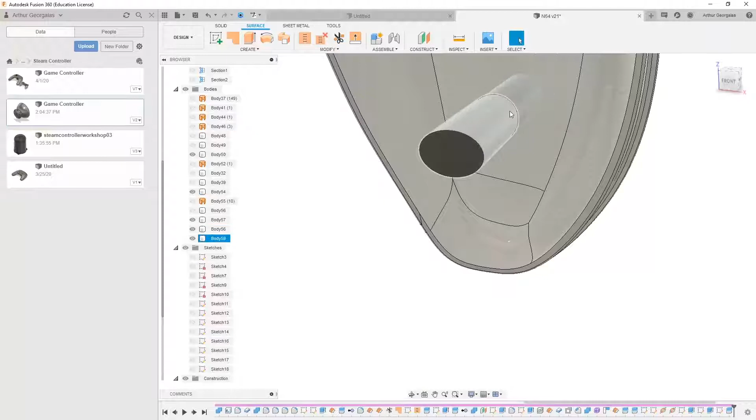Now, these will always have some sort of taper or draft angle to them, so we can include that. Let's just focus on, say, the bottom one, because it is the more complex one at this point. So what we can look at doing is just adding a chamfer. If we just go to modify chamfer, we can go two distances.

Generally you'd want to set this with a proper angle or something like that, so you can go distance and angle, but it doesn't really matter, it is just to visualize it. So two distances, we can bring that in, and this is just to ensure it doesn't get stuck in the mold as it's injected. So something like that would be plenty, as long as it comes out past here.

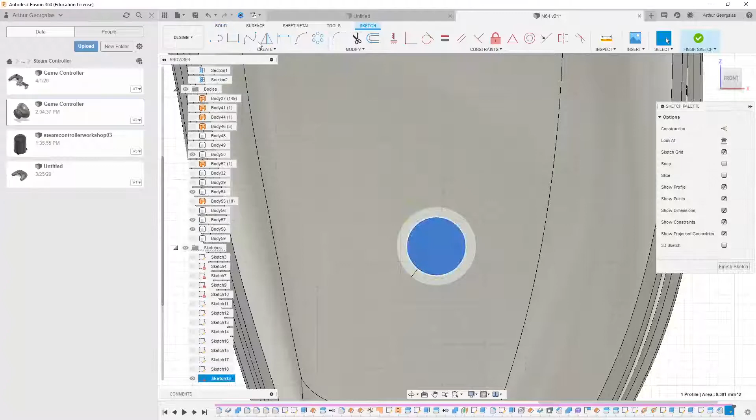Then we can go ahead and punch a hole right through the middle for, say, like a screw. When it comes to actually using a screw, what we should do is find one on McMaster-Carr and import one from there, so we can look up specific screws. I will leave that up to you.

Sometimes this doesn't always like finding the middle, which can be a bit annoying. So we can just go like that, and hope... no, it's not even going to let us pick a tangency. Can we project the surface using P, and just maybe offset it inwards? We can do that, so we just want something that's going to allow us to put our screw through, and it doesn't give us a diameter down here because it's not quite straight, so we can just check it.

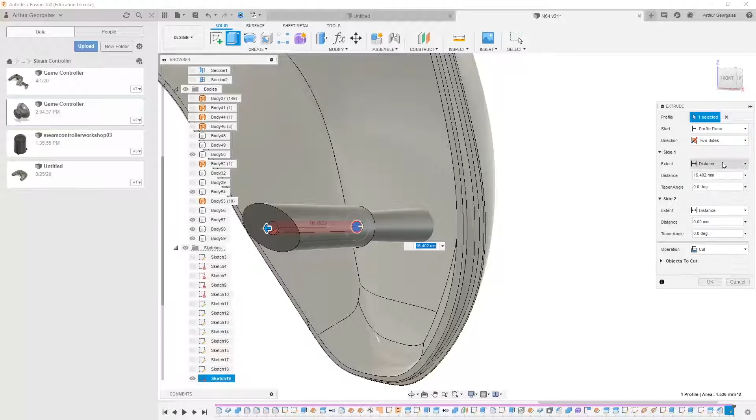Yeah, 1.4 mil is probably fine on that, again doesn't really have to be perfect at this point, but we do want it to go through both of these. So we can then go and extrude just that center section all the way through both, or just go two sides, extent all, objects to cut. We actually do want to just cut through everything here.

Alright, didn't select all there. We do want it to go through everything, but we want it to maybe not go all the way through here, just because the screw goes into here and this stays on the actual controller, it doesn't punch through the front. So maybe we only got it going in a little bit like that.

We might as well throw our chamfer on there. So just to double check the distance, that was like, let's go 0.75. This just allows you to make sure your chamfer is going in the same direction. You should be able to select a second edge as well, but sometimes it doesn't really like it because the distances are different. So if we go modify chamfer, that will be 0.75, and this one will just go up towards the end. So they're both tapered, but they come towards the middle and join.

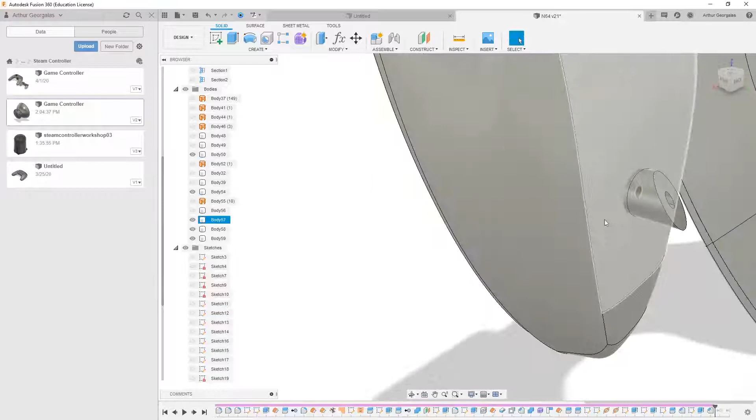What we want to do is make this match to this surface here, and we're going to have to add in a sort of counterbore as well. If we go to our wireframe, our screw head needs to actually sit on something. So our screw's got to come in through here and then sit up on a face over here. That's pretty easy enough, we can just go to our front plane and create a sketch.

We want to project one of these rounder faces, so probably even just that, and offset. Even if it's something like that, maybe this whole thing should have been a bit bigger, but it doesn't really matter, right now it's purely for visualization. We can turn this back on now, probably shaded with visible edges.

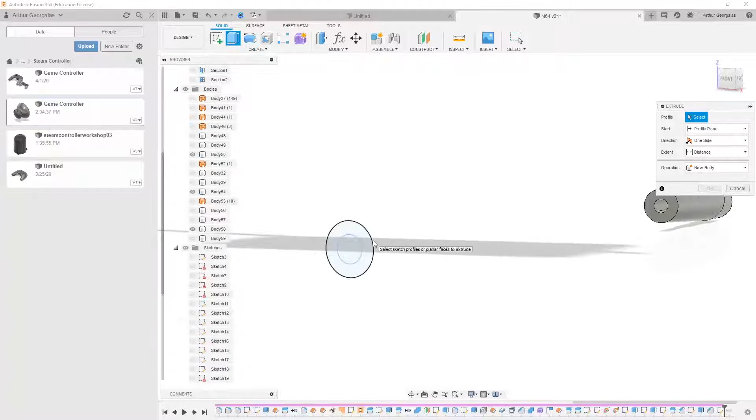Extrude. We just select, well, we can select both, it doesn't really matter. What we just want to make sure is our start can be from object, and we offset by 3 mil, maybe the other way. I'll just go -2, that'll be fine.

Then we actually pull it out like that. As you can see, that's starting to get a bit close there, so we probably want it to be somewhat different, a little bit wider overall, probably a thinner wall thickness, but we'll just live with that.

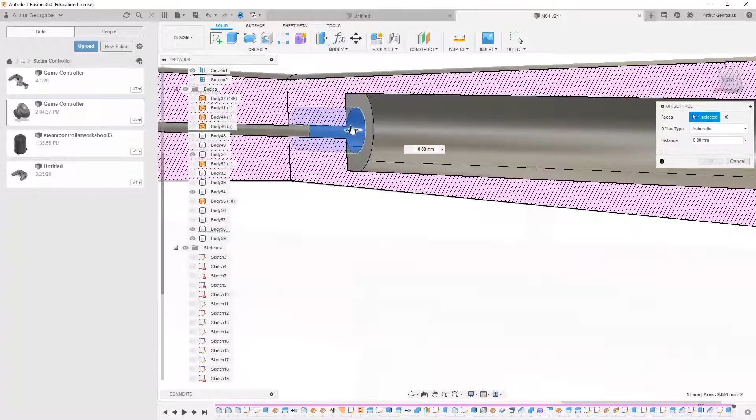Here we can see, if I bring in our favorite section view... we get somewhere where our screw can sit in, it can thread in down into here and here, pull them together. Maybe this one would be opened up slightly more, just so that it does all the threading onto this one. What you want to do is just select, press pull, grab that, go out a tiny bit, like that, and then that way the thread only bites into the bottom piece, or something like that.

So we want to show our main bodies wherever they are. I have failed to label mine well, and I've also still got my section view on. So let's have a look - there we go, there's one. We just want to clear that back end off. That can be easy enough by just going split body, body to split, that bottom one, splitting tool will be that face, you don't need to extend. We can just remove this rear section now.

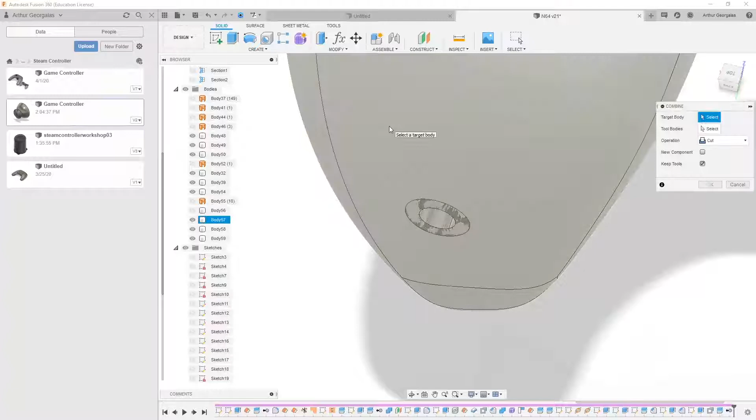Now we've got this. What we want to do is go back to our extrude now, where we cut out that center post, and objects to cut, we can just make sure this body's selected as well. Now that's cut out nicely all the way through on a relatively flat part of the controller, which is pretty good. So modify, combine, turn it from cut to join. We don't need to keep the tool, and we just go OK. There's one of our standoffs ready.

The front part is simple enough, this just has to be joined together because it's on the inside. So modify, combine, that and that, join, no need to keep the tool.

If we turn on our section view, we can see that we now have these two like this, standoff in the middle, that it can now sort of help pull the controller towards each other, towards the two sides with. So you should have these, at least one for each sort of thing here, maybe one here, maybe one in the middle. Generally these are also filleted a little bit on the back side, just so it doesn't feel too uncomfortable, probably like 0.2 or something like that.

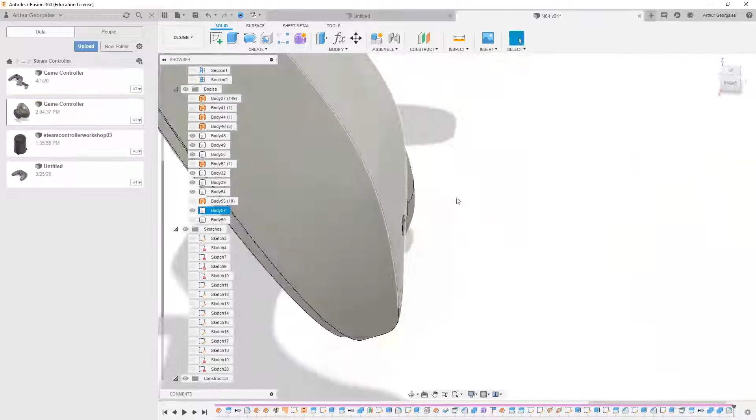So I would actually start designing this from the screw first, find a nice screw that looks right and is the right size, and you can bring that in using McMaster-Carr, put it into place, model everything around it if you want. But that's going to help add a real level of realism to your work when we go ahead and make this look a bit more real with proper lighting and stuff, and obviously materials to make it look like a proper PCB.